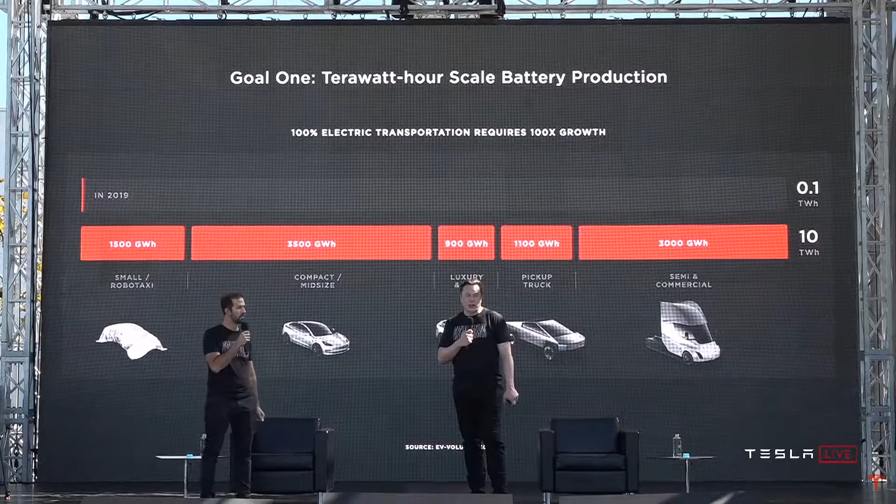Goal number one is terawatt-hour scale battery production. Tera is the new giga, and a terawatt is 1,000 times more than a gigawatt. We used to talk in terms of gigawatts. In the future, we'll be talking in terms of terawatt hours. This is what's needed in order to transition the world to sustainability.

You can see we're talking about 100x growth in batteries for electric vehicles to achieve this mission. And we are going to get there. It's just a matter of how fast, and our intention is to accelerate it.

You basically need on the order of roughly 10 terawatt hours a year of battery production to transition the global fleet of vehicles to electric. And the average vehicle lasts 15 years, so we're talking about 150 terawatt hours, give or take, to transition all vehicles of all types to electric. So it's a lot of batteries, basically.

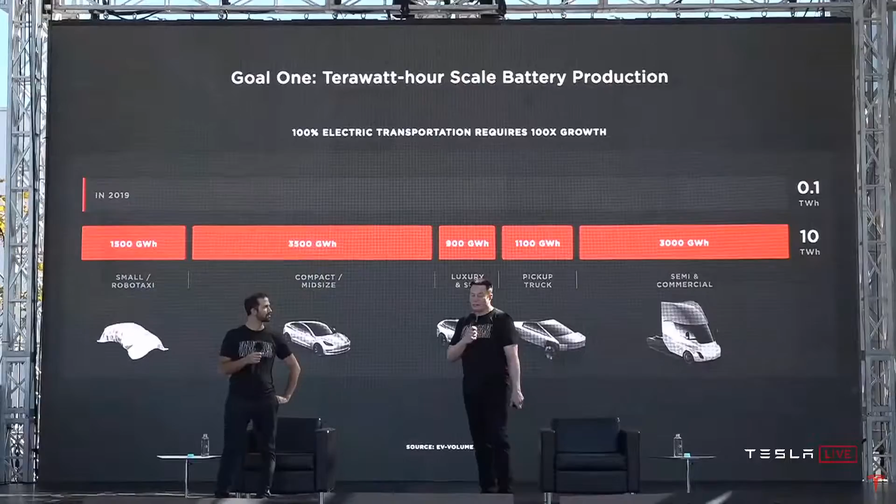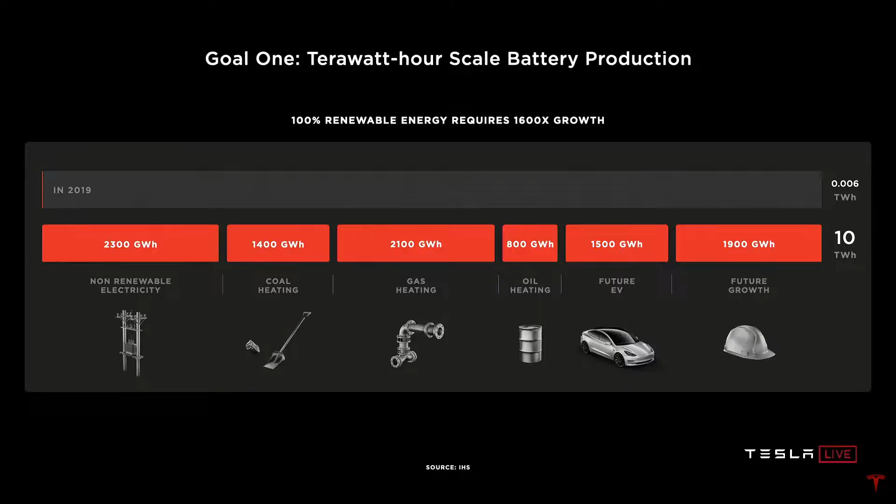And then on the grid side, we have a similar mountain to climb, 1,600 times growth from today's grid batteries to go 100% renewable on the grid and to take all of the existing heating fossil fuel uses in homes and businesses 100% electric.

And this number, I think, might grow even more, as the world economy matures and as countries with high populations industrialize, we could see this number be even more. But let's say it's roughly 20 to 25 terawatt hours per year, sustained for 15 to 25 years, to transition the world to renewable. This is a lot.

So today's batteries cannot scale fast enough. They're just too small. For Giga Nevada, 150 gigawatt hours per year is probably what we expect to make out of there, but this is really pretty small in the grand scheme of things. That's only 0.15 terawatt hours.

And they cost too much. We would need 135 fully built out Nevada gigafactories to achieve 20 terawatt hours a year. It's not scalable enough of a solution. We need a dramatic rethink of the cell manufacturing system to scale as fast as we can and should.

I think we should view this as more than just a question of money. Money is sort of like an ethereal thing, but it's really the amount of effort. You have a certain amount of effort, in terms of people and machines, and depending on how efficient that effort is, for a given amount of effort, you want the most amount of batteries. So it's not just a question of like, well, if we had $2 trillion, tomorrow you could make this. It's not that easy. You actually need to organize a massive number of people, build a lot of machines, build the machines that make the machines. And so it's incredibly important to have that effort yield the most number of batteries.

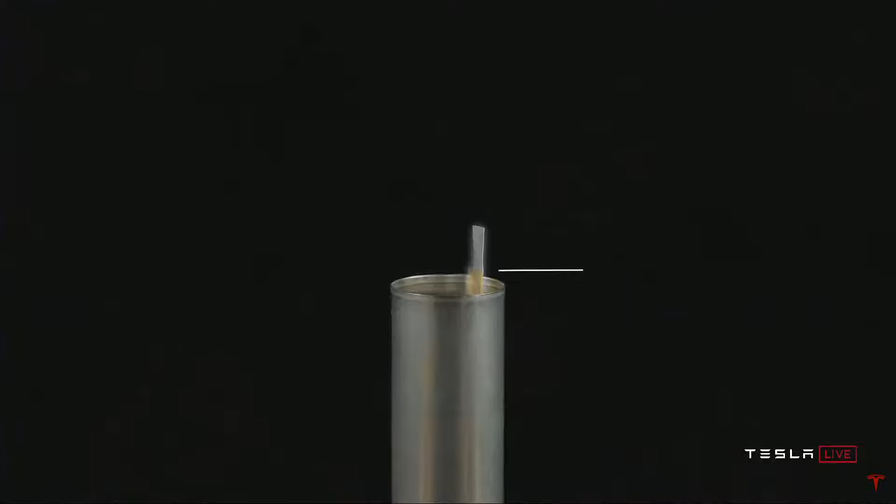So first, before we get too far into it, let's talk about what is in a battery cell. We've got the cap and the can, negative and positive terminals of the cell. When you open that cell, you've got a tab connected to those terminals, what we call the jelly roll, which is the wound electrodes on the inside.

You can actually see what this looks like as you unwind it. This is over a meter long in a typical 2170 cell. So it's quite a long winding process. And you can see the tab still there.

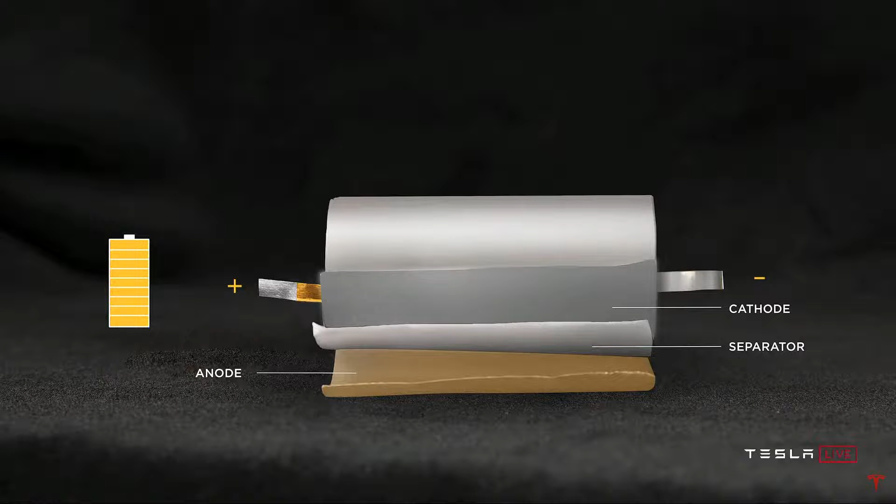To explain what's actually going on here, we've identified we've got anode, cathode, separator, positive and negative terminal. Watch what happens as we discharge the cell: lithium moving from anode to cathode, and then the reverse. When we charge the cell, lithium moving from cathode to anode across the separator. This is the basics of what makes all lithium-ion batteries, no matter what the form factor is.

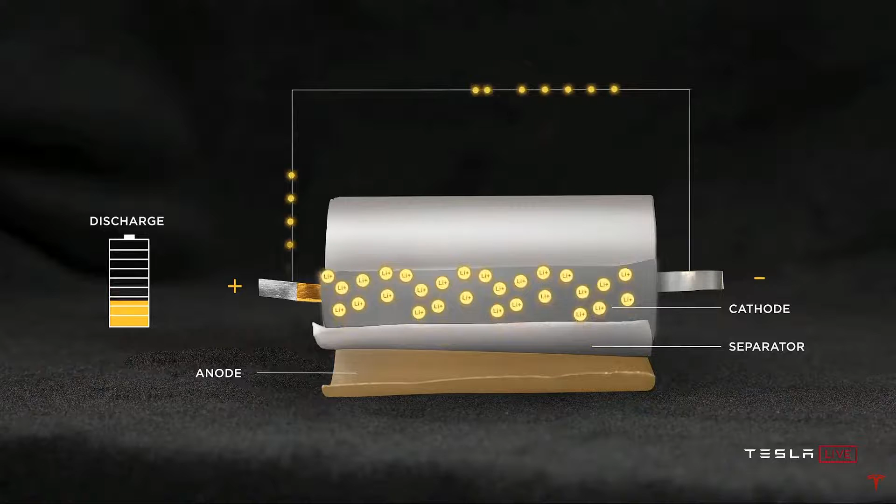And when we look at what's happened to date, at least in our products, we've moved from the 18650 form factor to the 2170 form factor through great collaboration with our partners, Panasonic, new partners like LG and CATL, and probably others in the future.

A slight note on why it's called the 18650, although not on the slide, versus the 2170, is that the first two digits refer to the diameter, and the second two digits refer to the length. So that helps explain why these numbers are weird. What's up with these weird numbers? But nobody could explain to me why there was an extra zero.

So I said, okay, well, we're deleting the zero that nobody can explain in future form factors. So that's why it's technically the 18650, but going forward it's the 2170 because we just got rid of the extra zero since it's pointless.

And this was an evolutionary step, going from 18650 to 2170, bringing 50% more energy into the cell. But when we look to the ideal cell design, if we were to do it ourselves, we need to go beyond just what's in front of us.

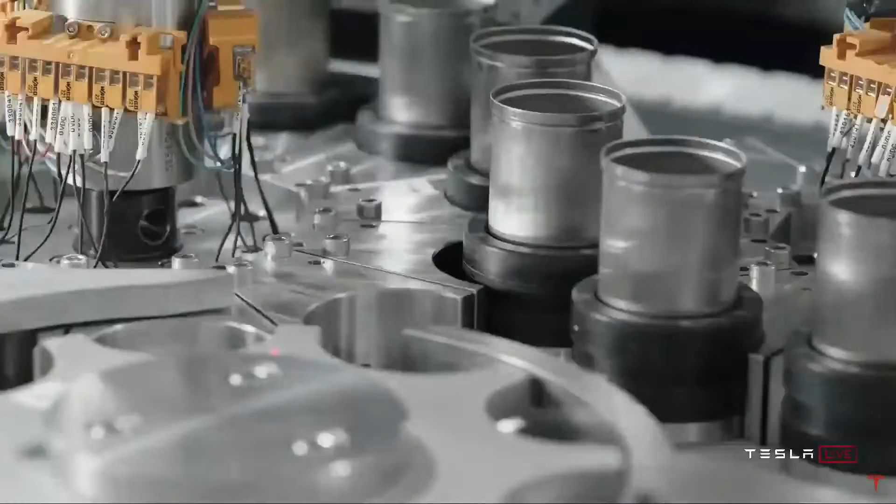It's a video of some of what's going on in the plant.

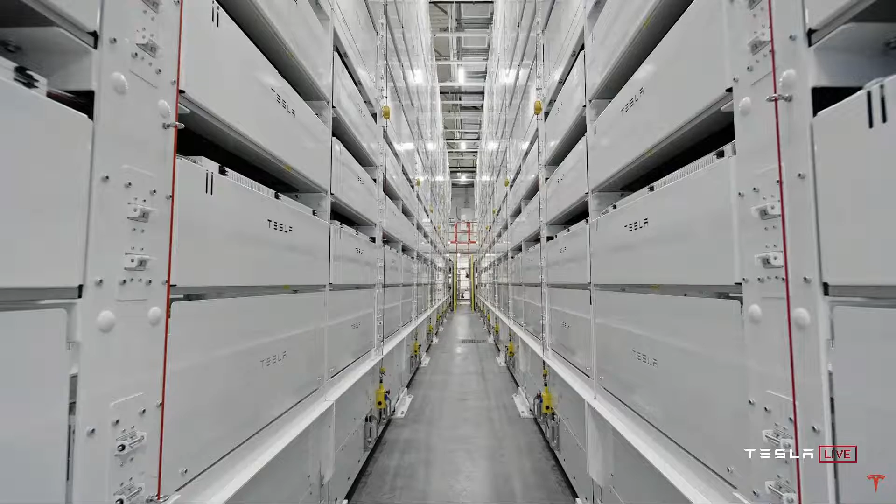To be clear, it will take about a year to reach the 10 gigawatt hour capacity. This is important to appreciate. When you build a factory, there's a certain capacity that you design to, and then it takes some period of time to actually achieve that capacity. So I'd say it's probably about a year before we get to the 10 gigawatt hour annualized rate with the pilot plant, and this is just a pilot plant. The actual production plants will be more on the order of maybe 200 gigawatt hours, maybe more over time.

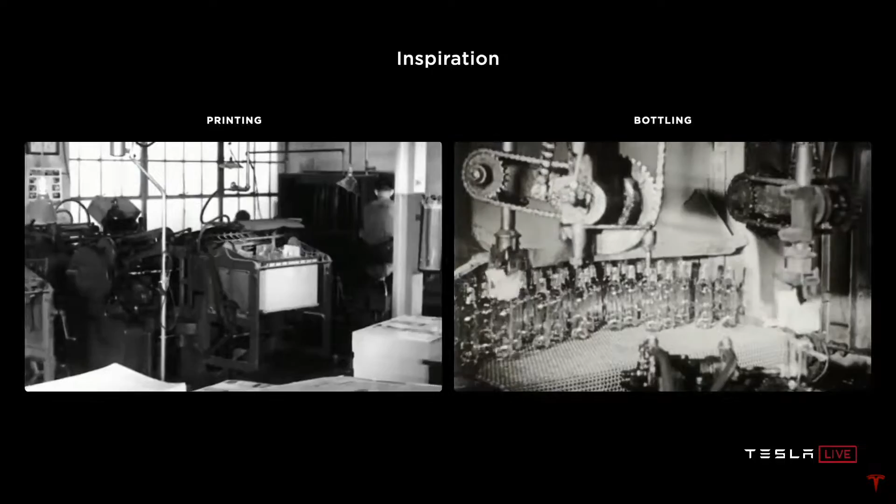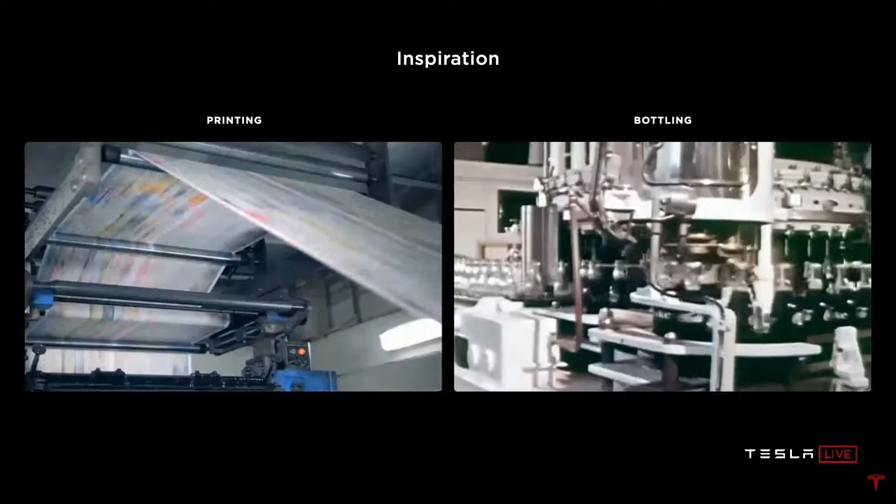When thinking about the ideal cell factory, we have inspirations behind us in the printing and bottling industry, where from humble beginnings, over a century of innovation has enabled mass scale, continuous motion, unbelievably low manufacturing cost. And when we think about the lithium-ion industry, which is really only in its 3rd decade of high-volume production, it has so far to go to achieve similar scale and simplicity. That was the inspiration we set out to the team as we thought about how to marry cell design and manufacturing in the best possible factory.

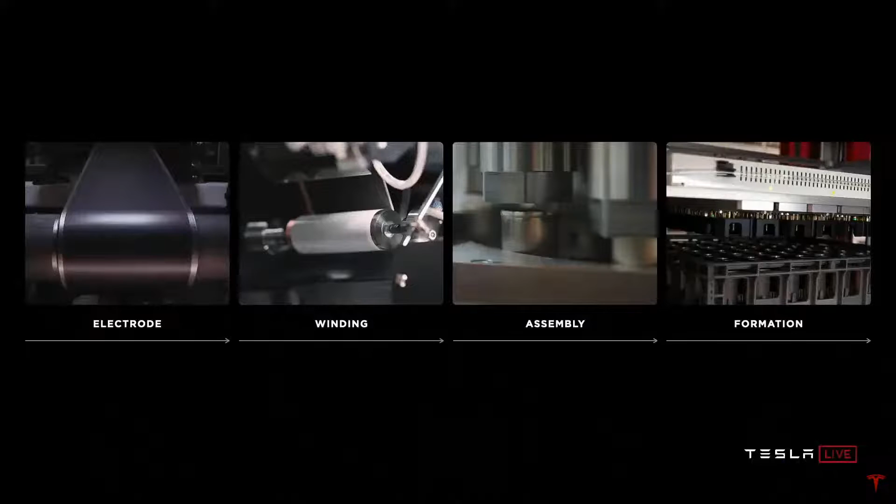Let's talk about what's in a cell factory. First, there's an electrode process where the active materials are coated into films onto foils. Then those coated foils are wound in the winding process we just talked about, where if you do have tabs, you have to start and stop a lot. Then the jelly roll is assembled into the can, sealed, filled with electrolyte, and then sent to formation, where the cell is charged for the first time, and where the electrochemistry is set and the quality of the cell is verified. We set out at every step of this process to take that inspiration and think about how we make those processes fundamentally better and more scalable.

One of the most important processes is where it all begins, the wet process of the electrode coating. Just to give you a sense of scale, I'm going to walk through what's in that wet process. You've got mixing, where the powders are mixed with either water or solvents for the cathode. That mix then goes into a large coat and dry oven where the slurry is coated onto the foil, huge ovens, tens of meters long, dried, and that solvent then has to be recovered. You can see the solvent recovery system. Then finally, the coated foil is compressed to the final density. When you're looking at this, you think, wow, that's a lot of equipment for one step, especially when you consider that little speck next to the coating oven is a person. This is serious iron involved in making batteries.

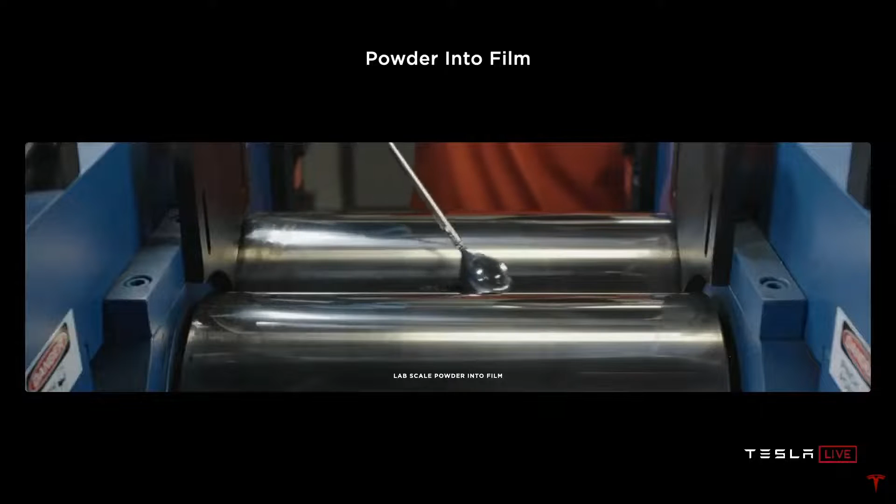Wouldn't it be great if we could skip that solvent step, which is one of those dig-a-ditch-and-then-fill-it kind of things, where you put the solvent in and then take it out and recycle it, and just go straight to dry mix to coat? That's what the dry process is about. In its most basic form, you can see it here on a bench top. Literally, powder into film, as simple as that. I mean, it's hard, actually, to be clear. If this was easy, everyone would do it. So it's not like dry coating electrode is actually easy—it's very hard to do what appears to be a simple thing.

It's worth noting that we acquired Maxwell a little over a year ago. It's certainly a good company and everything, but the dry coating they had was sort of, I would call, proof of concept. Since the acquisition, we've actually revved the machine that does dry coating 4 times. So we're in revision 4 post-acquisition of the machine, and there's still a lot of work to do.

So I would not say this is completely in the bag. There's still a lot of work to do, and as you go from benchtop to lab to pilot to volume production, there are major issues you encounter at every level. It's not like you make something work on your bench and bingo, now you can make a bazillion of it. It's insanely difficult to scale up.

But if you do scale it up, what you saw before becomes this. So you can see the motivation: a 10 times reduction in footprint, a 10 times reduction in energy, and a massive reduction in investment. But as Elon was saying, simple is hard.

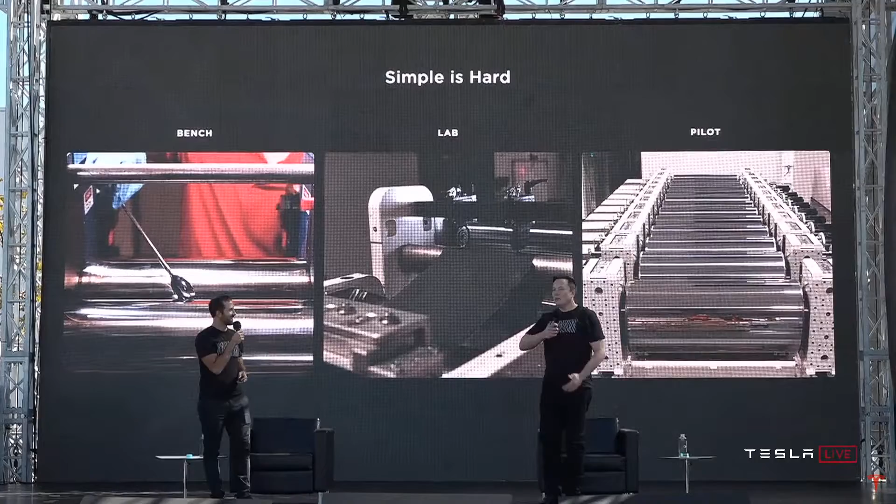To be clear, I would not say that right now it's just totally working. It's close to working, but even now at the pilot plant level, it is close to working. Well, it's fair to say it does work, but with not a high yield. So we're still ironing out the kinks, but we've made tens of thousands of cells, thousands of kilometers of electrode. We are on the 4th generation of the equipment, so we've learned a lot along the way.

It is super demanding because every atom has its place if you want to deliver the energy density, the cycle life, and the supercharging. But we're confident that we will get there, though it will be a lot of work along the way. There's a clear path to success, but a ton of work between here and there.

But this is a really profound improvement. Again, for people that know battery manufacturing, this is gigantic. We'll probably be on machine revision 6 or 7 by the time we do large-scale production. The rate at which the machines are being improved is extremely rapid — literally every 3 or 4 months is a new rev.

And beyond the electrode, we continue to innovate on every other process step. So let's talk a little bit about assembly, which is next.

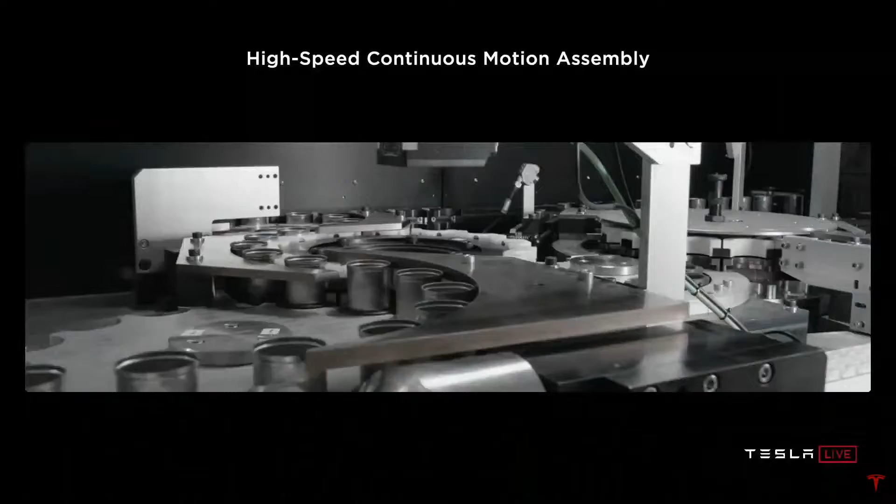The key to a high-performing assembly line is accomplishing processes while in continuous motion, thinking of the line as a highway — max velocity down the highway, no start and stop, no city driving. Exactly, no stoplights and traffic lights or anything. You want the highway. I want the highway.

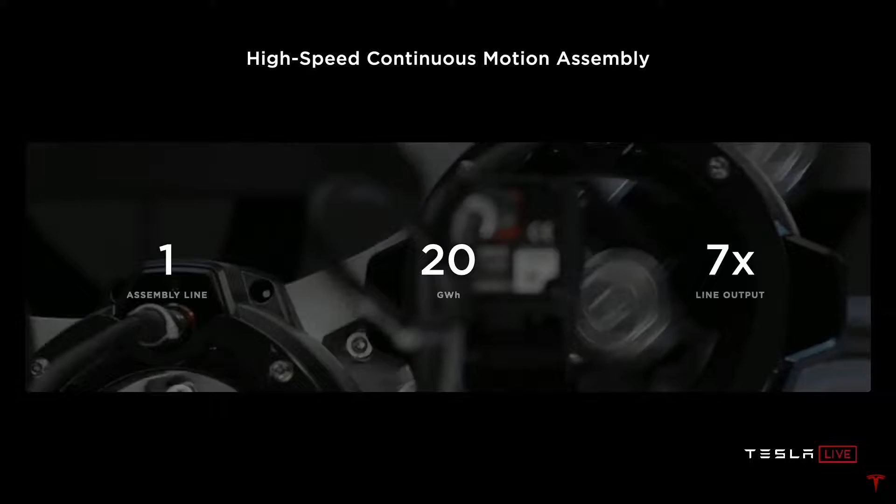Together with our internal design team that makes and designs this equipment, we coupled thinking about how to make the best cell with thinking about how to make the best equipment, so we could accomplish the fastest parts-per-minute rates on all these tools. Through all of that development, we were able to implement assembly lines — one line, 20 gigawatt hours, a 7 times increase in output per line. When you're thinking about scalability and pure effort, having one line be 7x the capability is just effort multiplying.

You can think about the fundamental physics of a factory. It's actually quite a lot like the rocket equation, where you've got your exhaust velocity and then the log of the start to end masses. So it's basically saying how fast are things going, and what percentage of the factory volume is doing useful work — conveyance does not count as useful work. So only the value-added steps.

If you break the factory down into cubic meter sections, or even smaller, say 1 liter sections, and ask is a majority of this volume doing useful work, you would be astounded at how bad most factories are. They're like maybe 2 or 3%, including our factory in Fremont. I think it is possible to get to at least 10 times that volumetric efficiency — more like 30% ish, maybe more — and be 10x better, which means the factory can be 10 times smaller.

And then the other thing is how fast are things going through the factory — it's like speed and density. The faster you go, a factory moving at say twice the speed of another is equivalent to 2 factories basically. The company that will be successful is the one that with 1 factory can accomplish what other companies take 2, 3, or 4 factories to do. So this is what we're trying to do here: how do we with 1 factory achieve what maybe 5 or even 10 factories would normally be required to achieve?

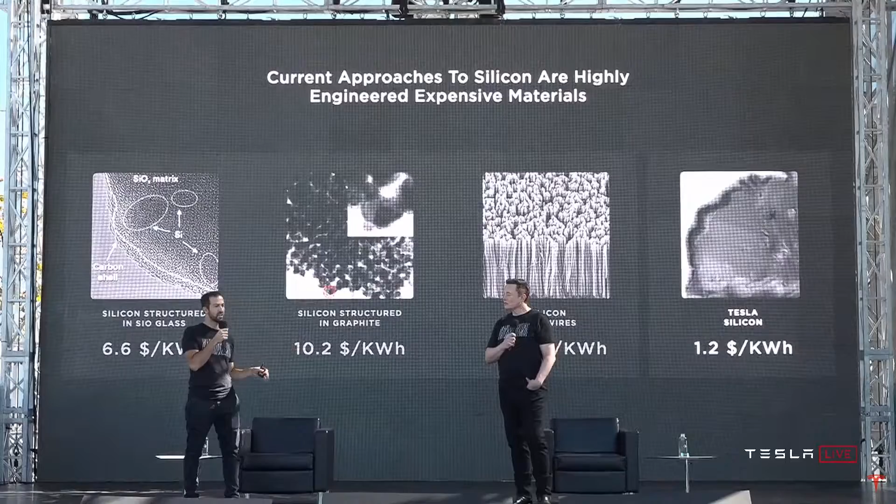What we're proposing is a step change in capability and a step change in cost. What that really is, is to just go to the raw metallurgical silicon itself. Don't engineer the base metal. Just start with that and design for it to expand in how you think of the particle in the electrode design and how you coat it.

Basically, $1 per kilowatt hour. If you use simple silicon, it's dramatically less than even the silicon that is currently used in batteries made today, and you can use a lot more of it. The anode would cost, with this silicon, $1.20 a kilowatt hour.

And how does it work? Start with raw metallurgical silicon, stabilize the surface with an elastic ion conducting polymer coating that is applied through a very scalable approach - no chemical vapor deposition, no highly engineered high capex solutions - and then integrate it into the electrode through a robust network formed out of a highly elastic binder.

In the end, by leveraging this silicon to its potential, we can increase the range of our vehicles by an additional 20%, just from this improvement. It gets cheaper and longer range. When we take that anode cost reduction, we're looking at another 5% dollar per kilowatt hour reduction at the battery pack level. And there's more.

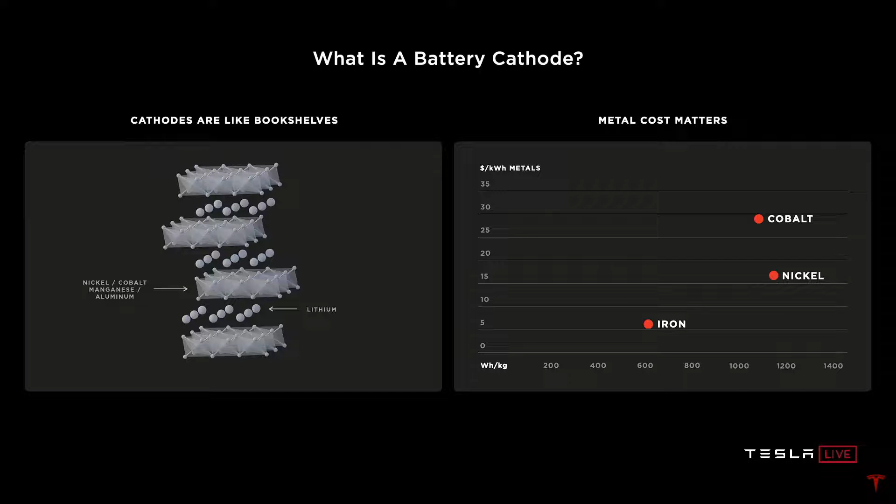Let's talk about cathodes. What is a battery cathode? Cathodes are like bookshelves where the metal - the nickel, the cobalt, the manganese, or aluminum - is like the shelf, and the lithium is the book. What sets apart these different metals is how many books of lithium they can fit on the shelves, and how sturdy the shelves are.

Cobalt is... it's tough to figure out the right analogy to explain cathode and anode, but a bookshelf is probably a pretty good one, in the sense that you need a stable structure to contain the ions. You want a structure that does not crumble or get gooey, that holds its shape in both the cathode and the anode. As you're moving these ions back and forth, it needs to retain its structure. If it doesn't retain its structure, you lose cycle life, and your battery capacity drops very quickly.

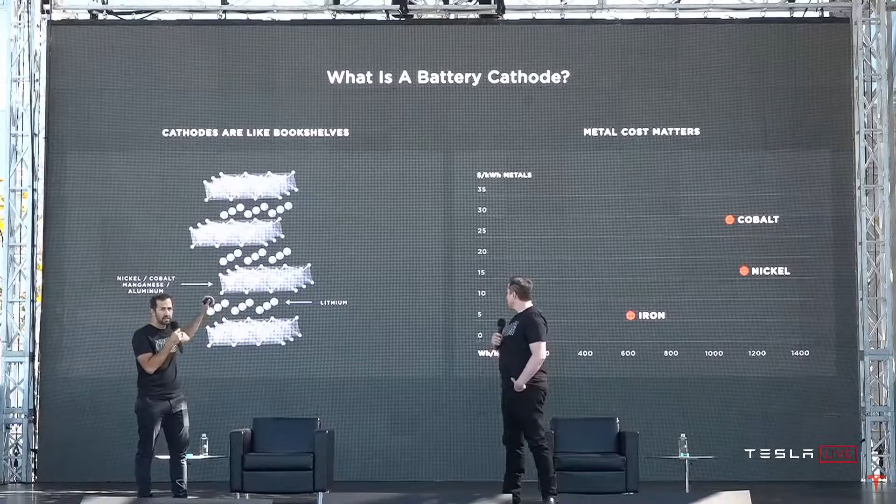One of the reasons why cobalt is even used at all is because it is a very stable bookshelf, and the challenge with going to pure nickel is stabilizing that bookshelf with only nickel. That's what we've been working on with our high nickel cathode development, which has zero cobalt in it. Leveraging novel coatings and dopants, we can get a 15% reduction in cathode dollar per kilowatt hour. It's a big deal.

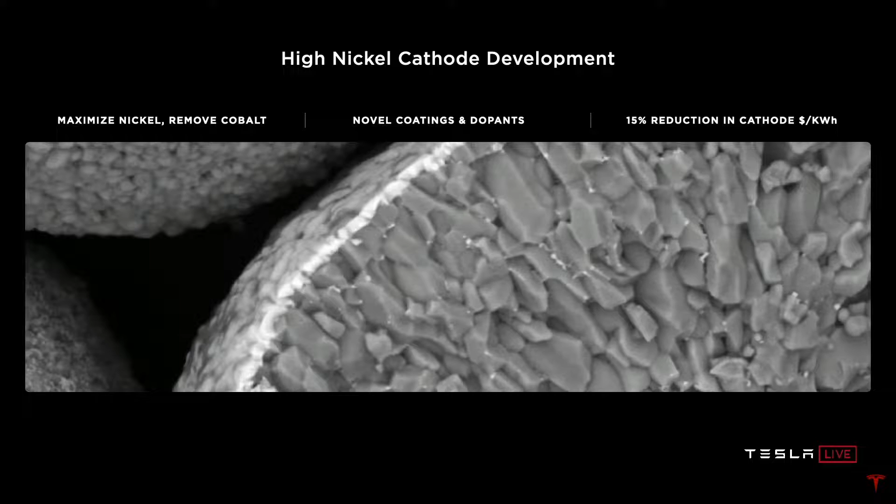But it's not just about nickel. In order to scale, we really need to make sure we're not constrained by total nickel availability. I actually spoke with the CEOs of the biggest mining companies in the world and said, please make more nickel - it's very important. And I think they are going to make more nickel.

But I think we need a kind of 3-tiered approach to batteries: starting with iron as a medium range, then nickel manganese as a medium-plus intermediate option, and then high nickel for long range applications like Cybertruck and the semi. Because for something like a semi truck, it's extremely important to have high energy density in order to get long range.

So just to give iron a bit more time—although if you look at the watt-hours per kilogram at the cathode level, iron looks like nickel's twice as good. But when you've fully considered everything at the pack level, nickel is only about 50 or 60% better than iron. So iron is a little better than it seems when fully considered, but nickel is still better; iron is good for stationary storage and medium range applications where energy density isn't paramount.

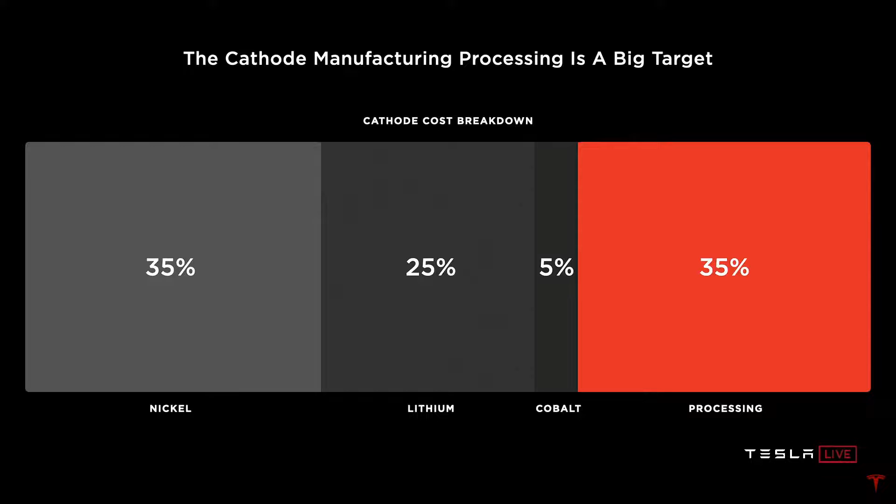Beyond the metals, because a lot of people spend time talking about the metals, actually the cathode process itself is a big target. 35% of the cathode dollar per kilowatt hour is just in transferring it into its final form. So we see that as a big target, and we decided to take that on.

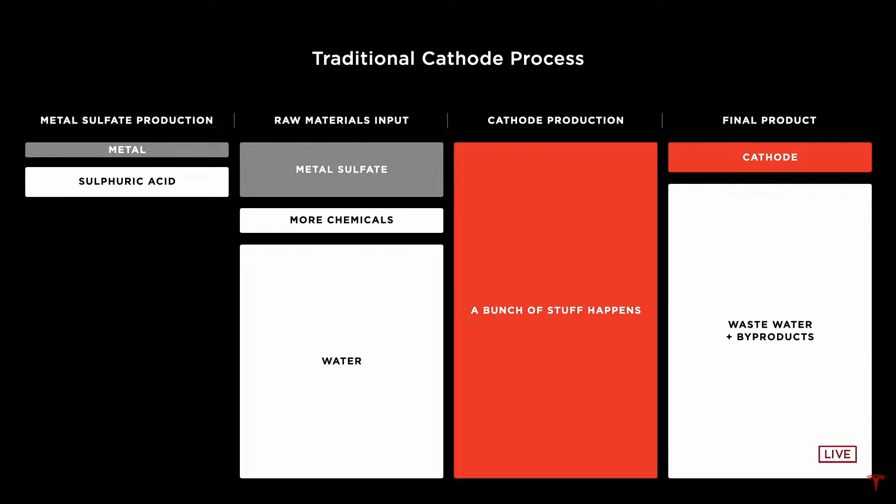Here's a view of the traditional cathode process. Starting at the left, the metal from the mine is first changed into an intermediate thing called a metal sulfate, because that's just what chemists wanted a long time ago. Then when making the cathode, you take this metal sulfate, add chemicals, add a whole bunch of water, a whole bunch of stuff happens in the middle, and at the end you get that little bit of cathode and a whole bunch of wastewater and byproducts.

It's insanely complicated. If you trace the total journey—like it's a small world journey of 'I am a nickel atom, what happens to me'—it's crazy, like you're going around the world three times. It's the moral equivalent of digging a ditch, filling in the ditch, and digging the ditch again. Total madness, basically. These things just grew up as legacy processes, how it was done before, and people connected the dots without thinking of the whole thing from first principles: how do we get from the nickel ore in the ground to the finished nickel product for a battery. So we've looked at the entire value chain and asked how to make this as simple as possible, and that's what we're proposing with our process.

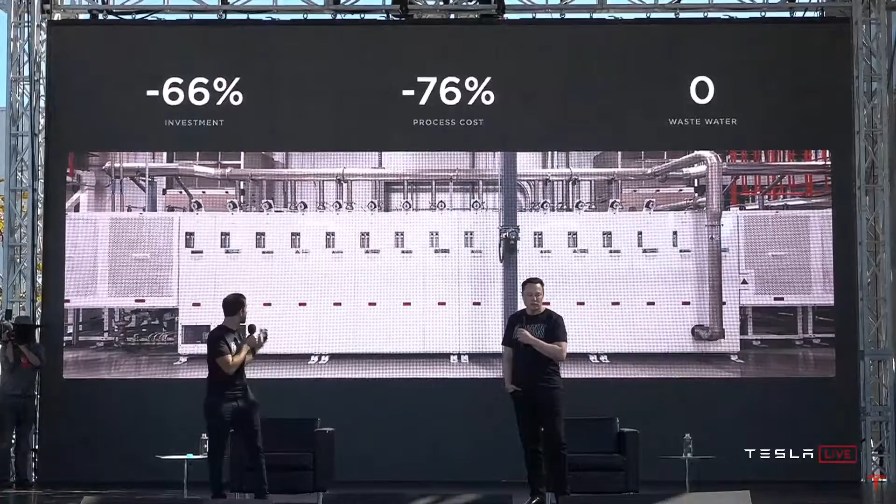As you can see, a whole lot less is going on here. We get rid of the intermediate, metal, water, final product cathode, and recirculate the water—no wastewater at all. Summarized, that's a 66% reduction in CapEx investment, a 76% reduction in process cost, and zero wastewater. A much more scalable solution.

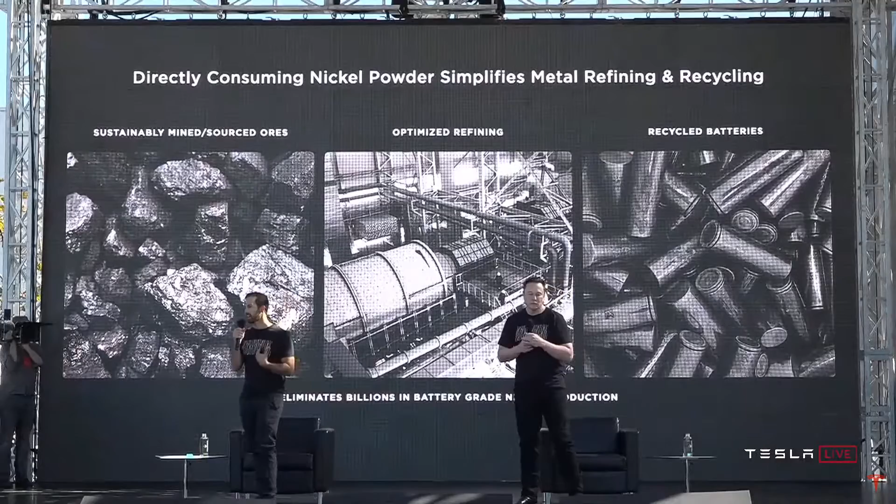When you think about the fact that we're now directly consuming the raw metal nickel powder, it dramatically simplifies the metal refining part of the whole process. So we can eliminate billions in battery-grade nickel intermediate production—it's not needed at all. And we can also use that same process to directly consume the metal powder coming out of recycled electric vehicle and grid storage batteries. So this process enables both simpler mining and simpler recycling.

Now that we have this process, we're going to go and start building our own cathode facility in North America, leveraging all of the North American resources that exist for nickel and lithium. Just by localizing our cathode supply chain and production, we can reduce miles traveled by the materials that end up in the cathode by 80%, which is huge for cost.

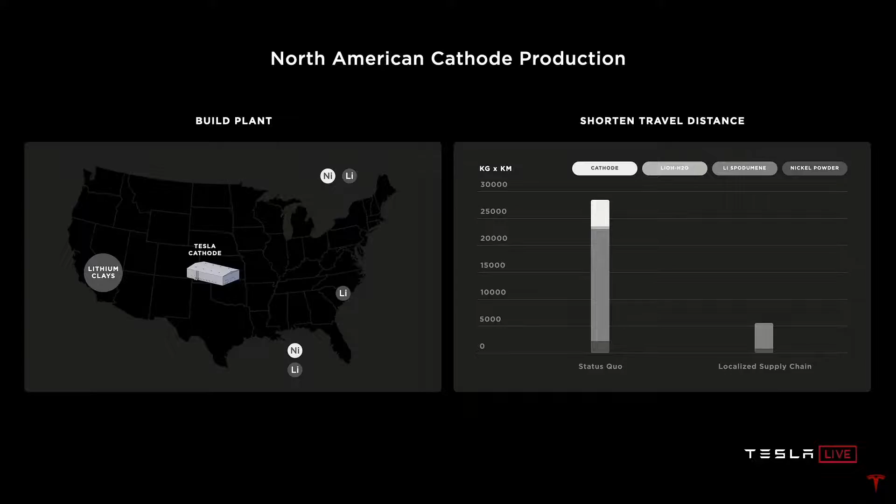To be clear, cathode production would be part of the Tesla cell production plant. So it would basically be raw materials coming from the mine, and out comes a battery. And on that note, the way lithium ends up in the cell is through the cathode, so we should obviously do on-site lithium conversion as well, using a new process we're going to pioneer—a sulfate-free process again, skipping the intermediate. That's a 33% reduction in lithium cost, with a 100% electric facility co-located with the cathode plant.

It's important to note that there is a massive amount of lithium on Earth. Lithium is not like oil; there's a massive amount of it pretty much everywhere. In fact, there's enough lithium in the United States to convert the entire U.S. fleet to electric, all 300 million or so vehicles, using only lithium discovered today, what we already know exists. People really haven't even been looking because it's so widely available.

But it is important to ask: what is the smartest way to take the ore and extract the lithium in an environmentally friendly way? Looking at this from a first principles physics standpoint instead of the way it's always been done, we found that we can actually use table salt, sodium chloride, to extract the lithium from the ore.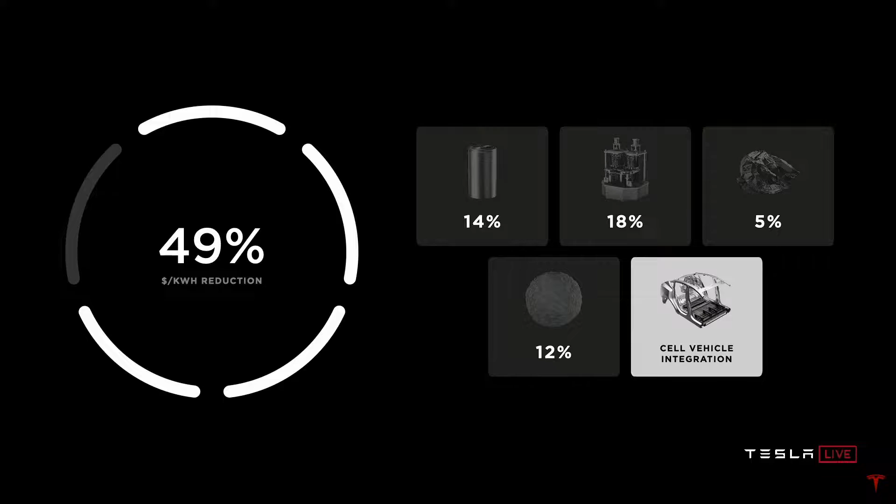There's an architecture that we've been wanting to do at Tesla for a long time, and we finally figured it out. I think it's the way all electric cars in the future will ultimately be made. It's the right way to do things.

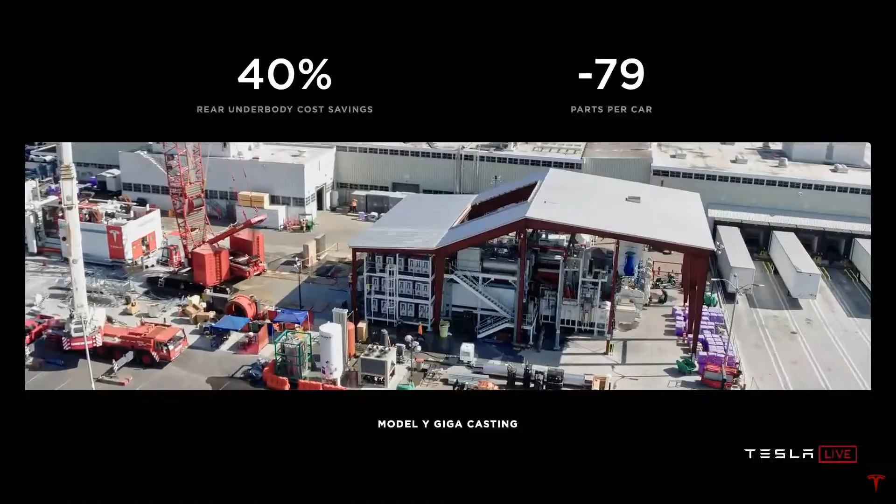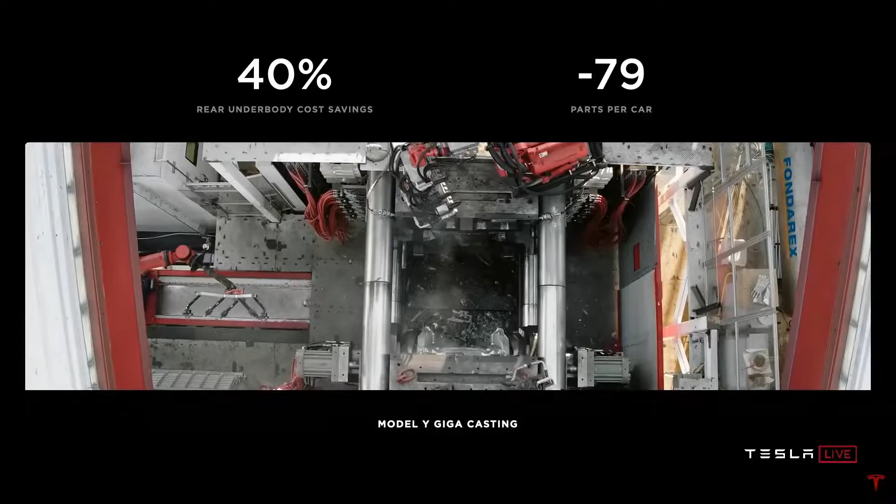It starts with having a single piece casting for the front body and the rear body. In order to do this, we commissioned the largest casting machine that has ever been made, and it's currently working just over the road at our Fremont plant. It's pretty sweet.

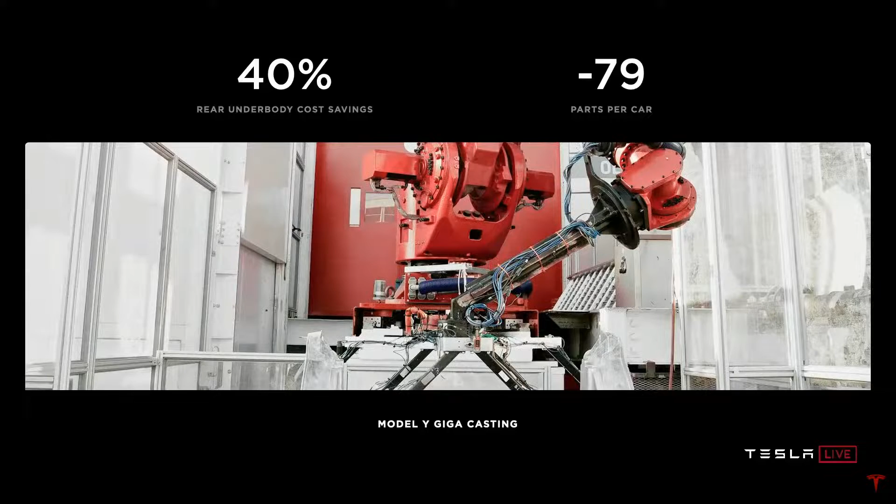Currently making the entire rear section of the car as a single piece, high pressure die cast aluminum. In order to do this, we had to develop our own alloy because we wanted a high strength casting alloy that did not require coatings or heat treatment. This is a big deal for castings, especially with a large casting. If you heat treat it afterwards, it tends to deform, kind of doing this potato chip thing, so it's very hard to keep a large casting to have its shape. There was no alloy that existed that could do this, so we developed our own special alloy of aluminum that has high strength without heat treat and is very castable. That's a great achievement of our materials team.

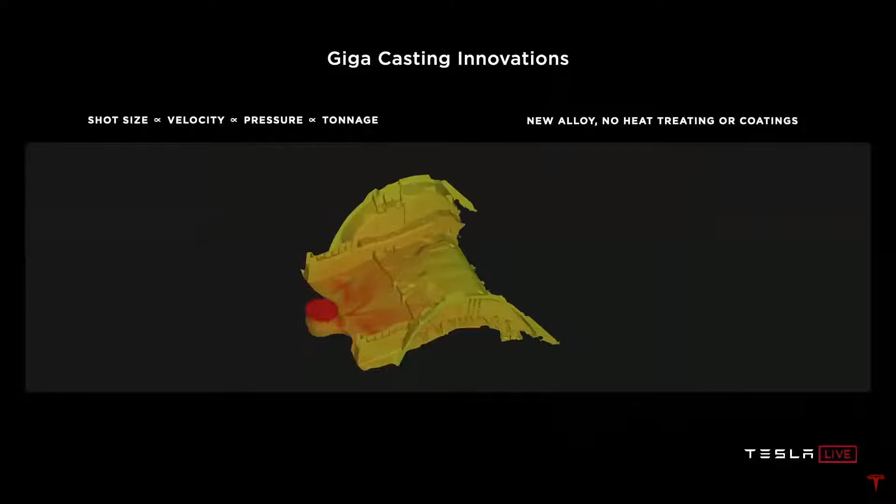In general, we've got a lot of advanced materials coming for Tesla, new alloys and materials that have never existed before. So you're basically making the front and rear of the car as a single piece, and that interfaces to what we call the structural battery, where the battery for the first time will have dual use. The battery will both have the use as an energy device and as structure.

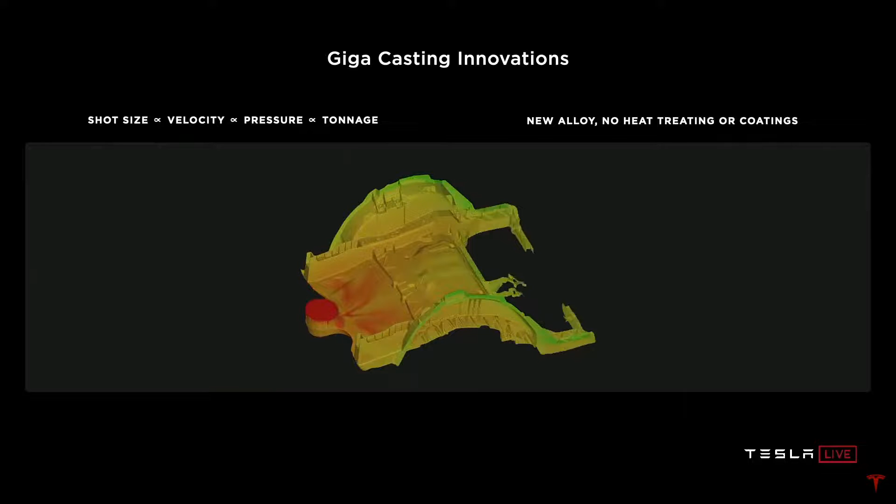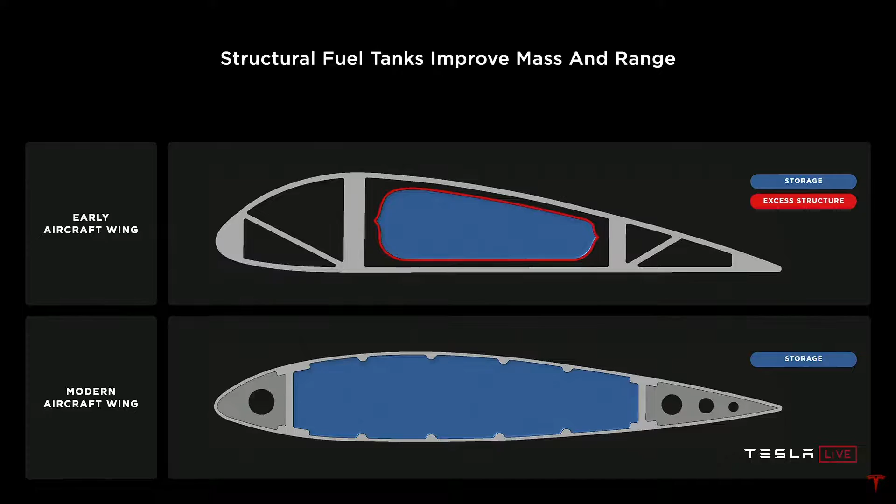This is absolutely the way things are done. In the early days of aircraft, they would carry the fuel tanks as cargo, and the fuel tanks were actually quite difficult to carry, basically worse than cargo. You had to bolt them down, it was very difficult. And then somebody said, hey, what if we just make the wing tanks, what if we just make the fuel tank in wing shape? So all modern airplanes, the wing is just a fuel tank in wing shape. This is absolutely the way to do it. The fuel tank serves as dual structure, and it's no longer cargo, it's fundamental to the structure of the aircraft. This was a major breakthrough.

We're doing the same for cars. This is really quite profound. Effectively, the non-cell portion of the battery has negative mass. We save more mass in the rest of the vehicle than the non-cell portion of the battery. So it's like, well, how do you really minimize the mass of a battery? Make it negative. Make the non-cell portion of the battery pack negative.

It also allows us to pack the cells more densely because we do not have intermediate structure in the battery pack. Instead of having supports and stabilizers and stringers and structural elements in the battery, we now have a lot more space in the battery because the pack itself is structural.

What we do is essentially, instead of having just a filler that is a flame retardant, which is currently what is in the 3 and Y battery packs, we have a filler that is a structural adhesive as well as flame retardant. So it effectively glues the cells to the top and bottom sheet, and this allows you to do shear transfer between the upper and lower sheet. Just like if you have a Formula One car or a racing boat, with carbon fiber face sheets and, say, aluminum honeycomb between them, this gives you incredible stiffness. It's really the way that any super fast thing works: you create basically a honeycomb sandwich with two face sheets.

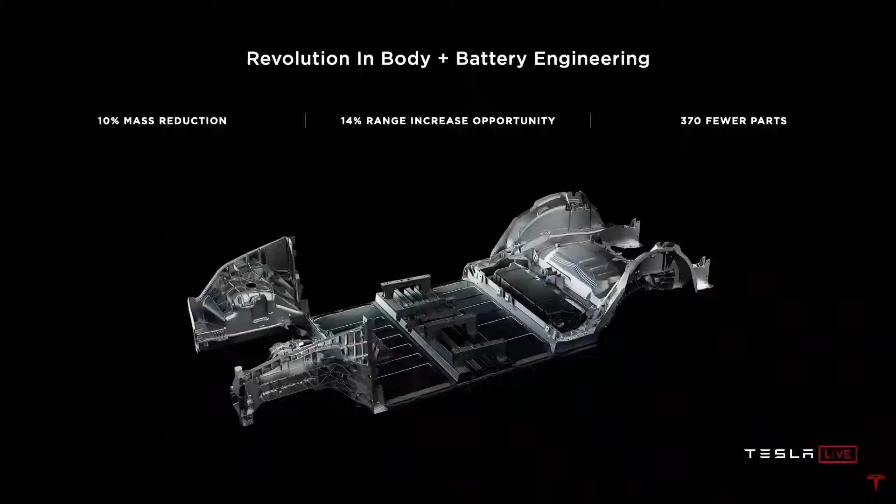So, 10% mass reduction in the body of the car, 14% range increase, 370 fewer parts.

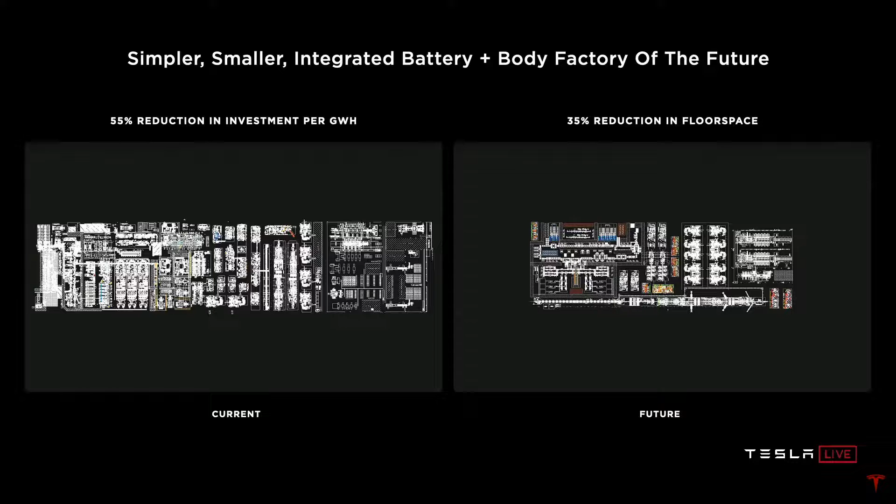I really think that long term, any cars that do not take this architecture will not be competitive. And it's not just a better product—in the factory, it's a massive simplification. You saw the part removal. It's casting machines, it's the structural battery pack. So we're looking at over 50% reduction in investment per gigawatt hour, 35% reduction in floor space, and we'll continue to improve that as we make the vehicle factory of the future.

So it's major improvements on all fronts, from the cell all the way to the vehicle. In addition to enabling additional range and improving structural performance, it's worth another 7% dollar per kilowatt hour reduction at the battery pack level, bringing our total reduction now to 56% dollars per kilowatt hour.